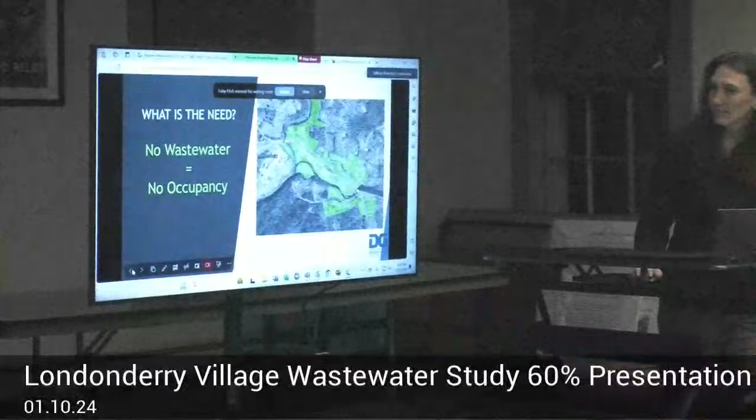So some of the typical needs for wastewater projects. Oh, no. Hope that doesn't keep jumping forward again.

Some of the typical needs for wastewater projects include health and sanitation concerns and aging infrastructure. Properly sized and functioning wastewater systems are critical to public health and environmental protection. The typical lifespan of a private septic system is 15 to 40 years, depending on soils, construction quality, and maintenance.

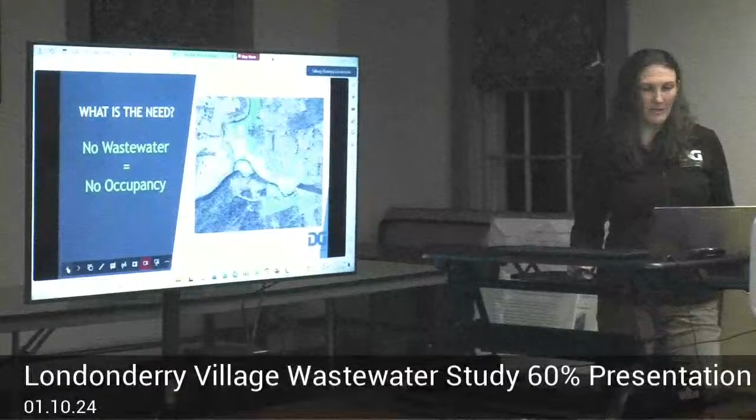Approximately 18% of the septic systems in the North Village and 29% in the South Village are more than 40 years old. Aging infrastructure is typical in Vermont's small villages, as is high-density development or small parcel sizes. It is more challenging to replace a septic system on a small parcel without impacting your neighbor's property, well, septic, etc. Often replacements in high-density villages are a best fit solution that do not fully meet the regulatory requirements.

These are only approved by the state to maintain the existing use of the parcel, as without wastewater capacity, a home would become unlivable and a business or commercial building would become unusable. Between the two villages, there are an estimated 24 septic systems that are within well isolation zones. 2 of these wells are permitted public water supplies. These septic systems tend to be grandfathered systems, and they are not required to improve or be moved unless an increase in use is required or requested.

Another challenge that faces property owners needing to replace a septic system is the existing soils. Soils in Londonderry are generally very challenging for wastewater disposal, and they typically require a mound system or some type of innovative approach, which are costly. Proper wastewater disposal is also critical to environmental protection.

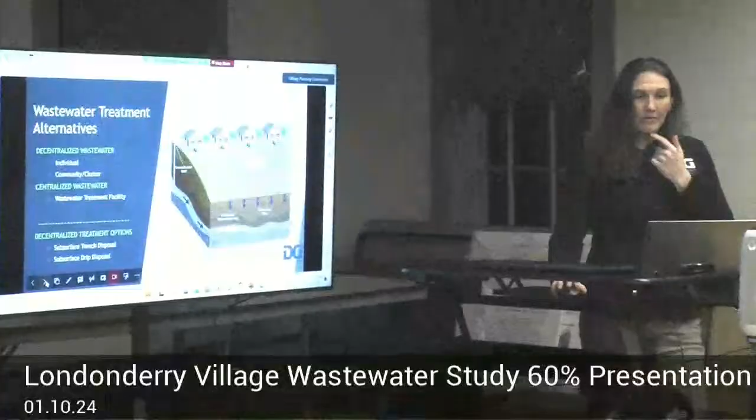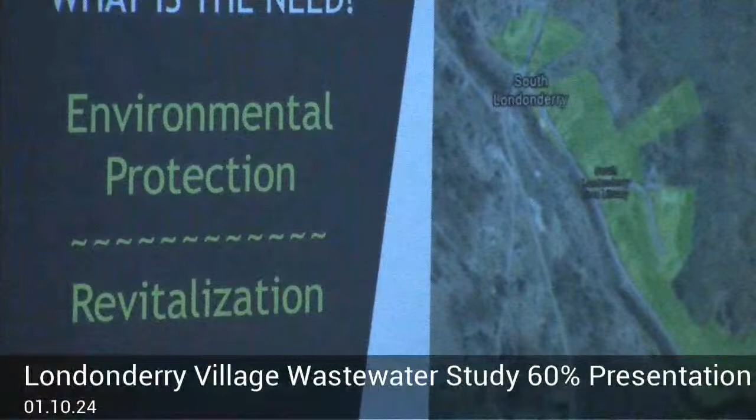Londonderry's 2 villages are located along the West River, with several parcels located within the floodway or floodplain. When flooding occurs, these septic systems are fully submerged in the floodwaters, leaching bacteria, E. coli, and other harmful contaminants into the surface waters. Some of these systems may be washed away, leaving a sewage pipe draining directly to the river. If one of these systems fails, it is possible to replace it within the floodplain, but not within the floodway.

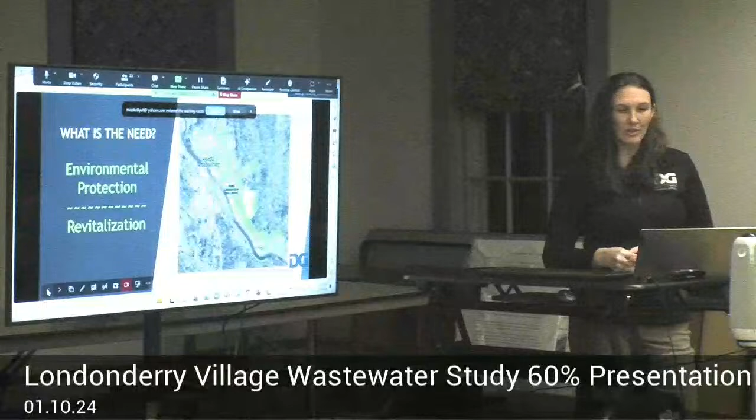The reach of the West River through South Londonderry is considered impaired due to bacteria. The monitoring results that different organizations do throughout the summers show intermittent elevated E. coli levels based on sampling at the Route 100 bridge right here in South Londonderry. The upstream and downstream reaches of the West River are reported to be in excellent condition. So the contamination is likely to be caused by a variety of sources, including septic systems, but we cannot definitively tie it to septic systems. Wastewater capacity also has a significant impact on revitalization.

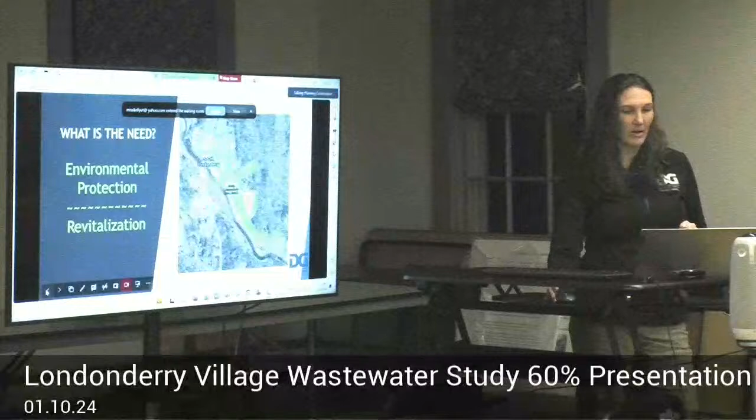Economic and community development, as well as business sustainability, tend to rely in part on available water and wastewater capacities. Due to high density development, water and wastewater capacities and opportunities are limited in the village areas for both existing and new businesses. Businesses tend to get stuck in time where they can't grow any further due to wastewater constraints.

So sufficient water and wastewater capacity would allow buildings to be fully occupied, possibly with mixed-use development consisting of commercial and residential uses. Not only does this allow for revitalization of villages, but also may provide additional housing, which is a critical need in many towns, including Londonderry.

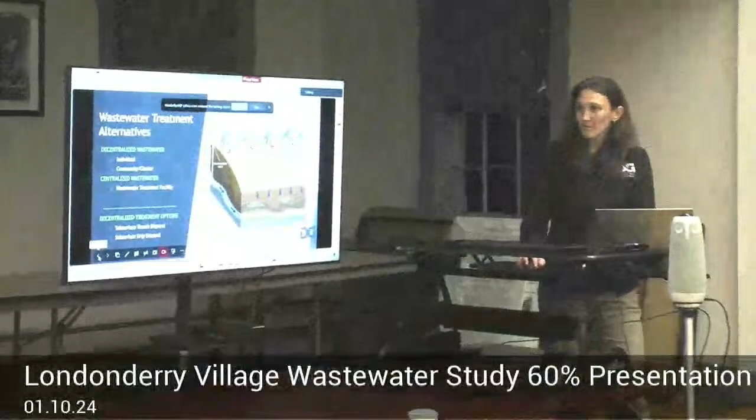Christine, it looks like somebody's trying to possibly get in. I think Heather's taking care of that. It's just a delay.

So we're going to get into the alternatives. Before continuing, I do want to note that we are talking about a 60% report. So the alternatives and costs are still evolving. So if you actually read the 60% report, from front page to back page, and I'm sure you all did,

you may see that some of the alternatives or costs that we're talking about tonight are slightly different from what was in the report. And that's just based on feedback and new information that we've received since the report was submitted in December. And the alternatives and costs are going to continue to evolve as we move into the 90% report and final report and then into final design.

We generally do not expect significant changes to the concepts that are being presented in the 60% and tonight. There are a couple alternatives that are still being evaluated and may have significant positive changes. And I'm going to note those as we go through the presentation. The costs presented in the 60% report and in this presentation, as well as future iterations of the report, are all preliminary and subject to change as the project develops. It's my little disclaimer.

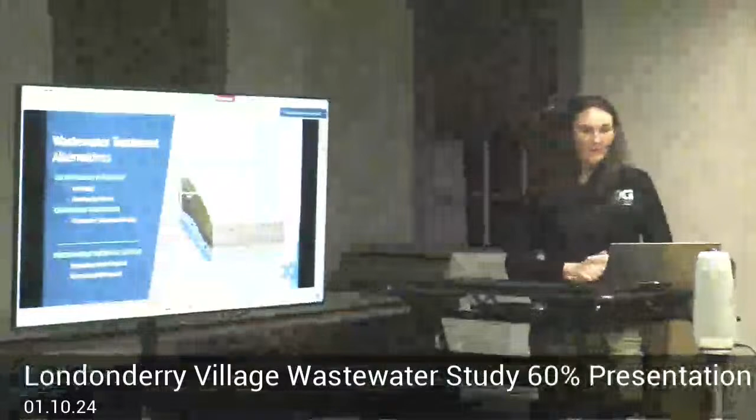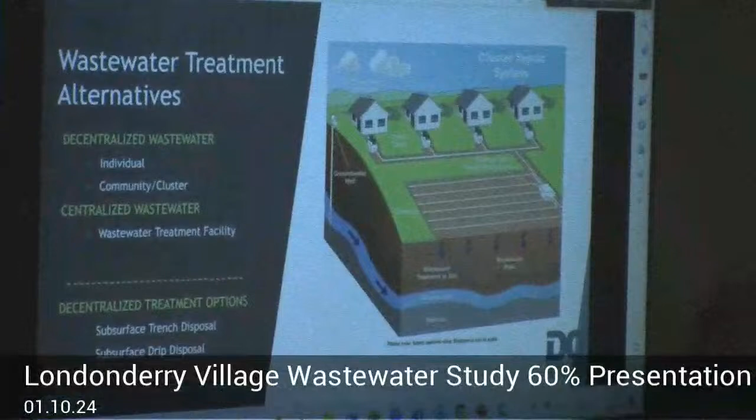So public wastewater systems provide a reliable and low-risk wastewater disposal alternative for properties in villages, and can also greatly reduce the number of potential sources of contamination in and around villages. Options for public wastewater systems include decentralized systems, such as community systems or cluster systems, or centralized systems, such as a wastewater treatment facility.

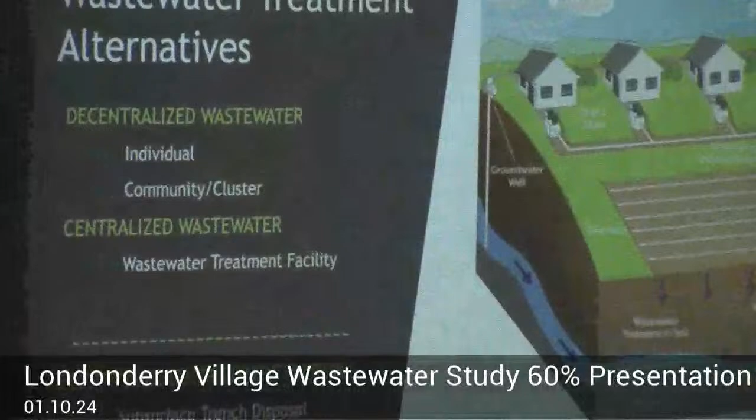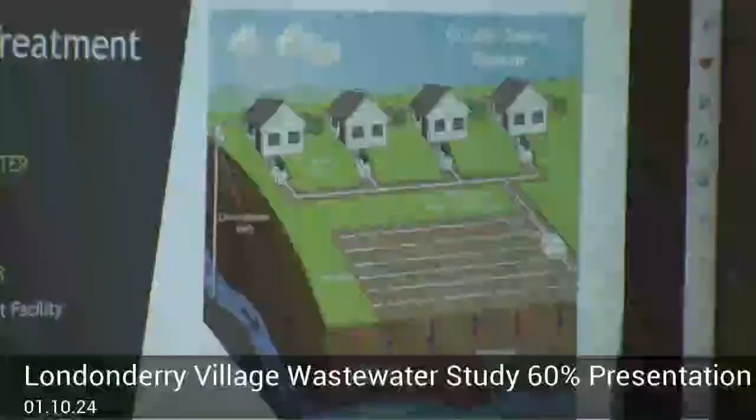When we look at decentralized specifically, those utilize soil-based treatment methods for wastewater disposal. And the two soil-based alternatives that we've considered are subsurface trench disposal and subsurface drip disposal.

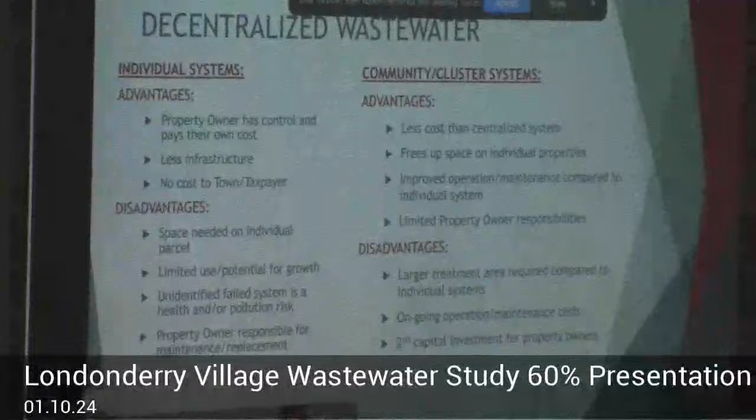So on the smaller end, is this going to jump forward again? On the smaller end of decentralized wastewater is the individual home. So this is what everybody has right now.

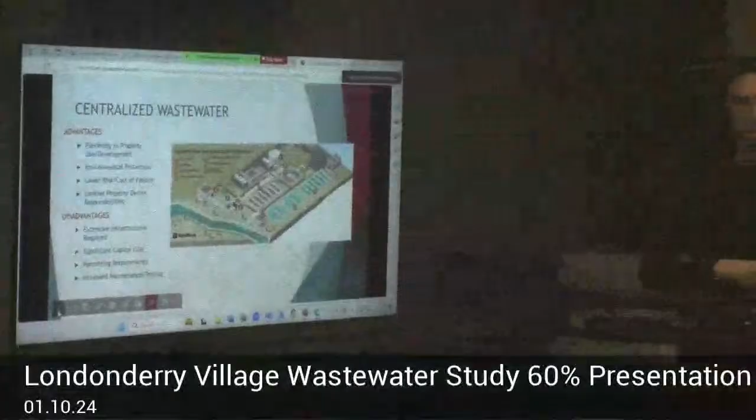Did we jump ahead again? Yeah. Just keep letting me know.

Decentralized wastewater systems can also be utilized to serve a group of homes or buildings and are known as cluster or community systems. Cluster generally refers to a smaller system serving a group of buildings, and a community system refers to a larger system that's serving a group of buildings.

For an individual system, the advantages include the property owner having complete control over the system, less infrastructure compared to any type of community system, and there are no costs that are borne by the town or the taxpayer. All the costs are borne by the property owner.

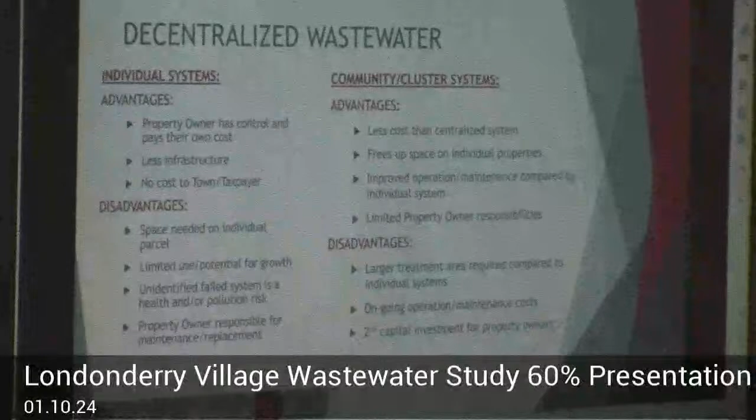Disadvantages are the space required on the parcel for wastewater and how that could impact the use or potential growth of the parcel, health and/or pollution risks associated with unidentified failed systems or systems that are simply not repaired, and the property owner is solely responsible for maintenance or replacement.

For a typical mound system, installation costs can range from $30,000 to $40,000 depending on site requirements. And $40,000 isn't even a cap. Depending on what is necessary, it could even go higher than that.

For a community or cluster system, the advantages include lower capital and operation and maintenance costs when compared to an equivalent centralized treatment system, more space available on individual parcels for wells and buildings, improved operation and maintenance, which protects public health and the environment, and minimal property owner maintenance requirements, which are usually focused on the sewer service itself.

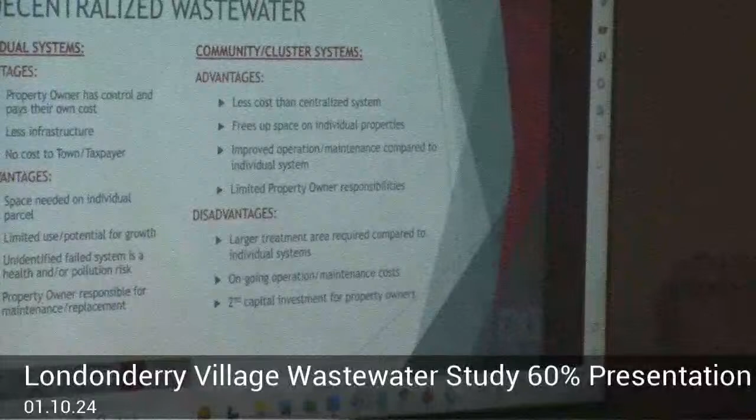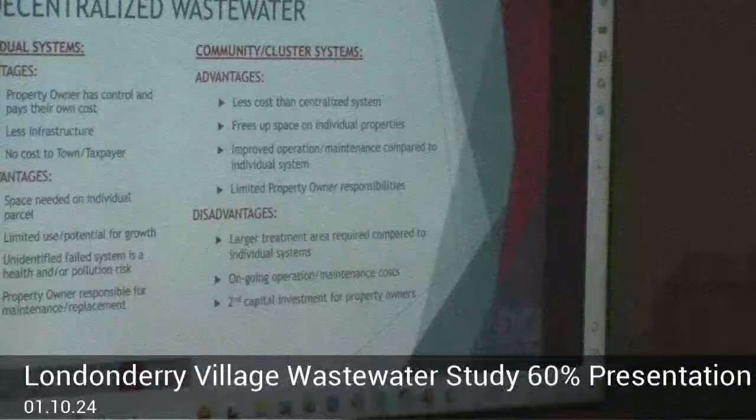Disadvantages are that there is a larger space required for the treatment system as compared to an individual septic system. Ongoing operation and maintenance costs for the users, so there will be annual ongoing costs to operate and maintain the system. And for those property owners who have previously paid for a septic system, that property owner's share of the capital cost of a community system would be a second investment for that property owner. And we're going to discuss cost of the community systems a little bit later.

So centralized wastewater is typically used by larger municipalities and consists of a collection system and a wastewater treatment plant. Centralized treatment plants are typically located some distance from the area that's being served and include treatment methods such as activated sludge, sequencing batch reactors, and rotating biological contactors.

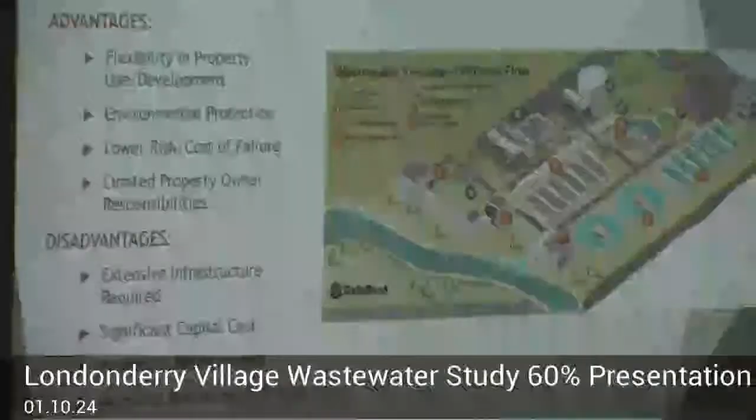The advantages include greater flexibility in property use due to having the space available on individual properties without having a septic system there. And generally, these types of facilities are designed with a decent amount of excess capacity. If you're going to spend the money on constructing one of these, you're going to have some excess capacity for growth, and that allows for a lot of flexibility in terms of various property uses for the properties connected to it.

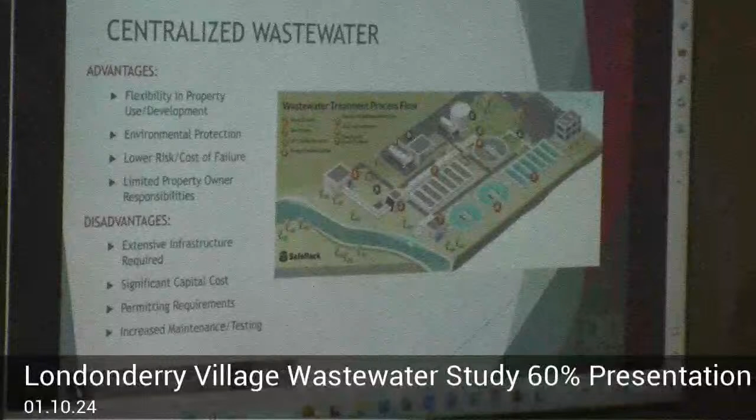Another advantage, greater environmental protection through oversight by a licensed operator and annual inspections of the system. Lower risk and cost of failure per property owner than on an individual system. So if there's a repair or replacement needed on this type of system, you're sharing that cost with everybody on the system compared to paying for it by yourself as an individual. And then again, minimal property owner maintenance requirements, which are generally the sewer service.

Disadvantages are that there is extensive infrastructure required for the treatment plant, significant capital costs for the treatment plant, substantial permitting requirements, and there's regular maintenance and testing requirements, which leads to higher operation and maintenance costs when compared to decentralized alternatives. Due to the variation in type and scale of treatment for a centralized system, the cost can vary greatly, with the cost per connection of smaller systems typically being much greater than those of larger systems.

Based on recent projects, the cost and scale of centralized wastewater is likely greater than what is necessary for Londonderry. And just for example, a wastewater treatment facility serving 1,500 connections has an estimated replacement cost of over $21.5 million, which equates to approximately $14,000 per connection. A smaller facility serving 140 connections with an estimated replacement cost of $12.5 million is averaging nearly $90,000 per connection.

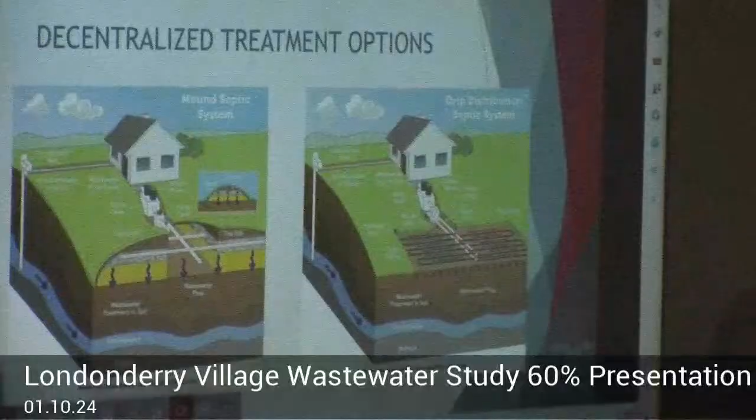So as I noted previously, there are two alternatives for treatment in decentralized systems. Subsurface trench disposal is shown on the left as a mound system, which is the most common type of treatment or disposal system you're going to see here in Londonderry. This is also, in general, subsurface trench disposal is one of the most common methods of subsurface wastewater disposal.

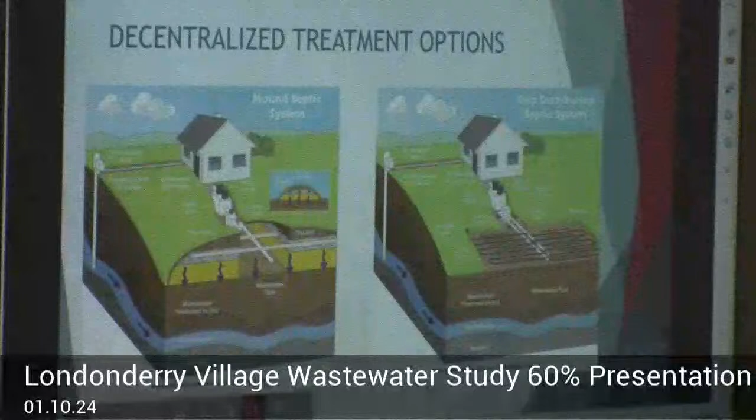If we ignore the house in the background of that schematic there, a community system would look very similar to this diagram. Wastewater effluent is being pumped through pipes laid out in a grid system, 1 to 3 feet under the ground, and exits those pipes through small holes in the pipe called orifices. The wastewater effluent is treated by microbes in the soil as it infiltrates, and due to hydraulics, there's limited flexibility with the shape of these disposal fields.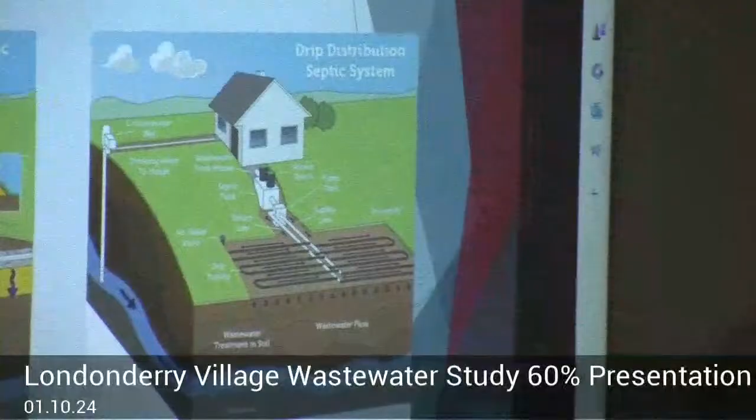Subsurface drip disposal, shown on the right here, can provide more flexibility than trench disposal. Wastewater effluent is dispersed by pumping through small flexible tubing with controlled orifices that are installed 6 to 12 inches below the ground surface. These systems are increasingly popular where disposal fields are placed under recreation fields or large grassed fields, lightly wooded areas, and on sites that have sloping or irregular topography. The layout flexibility allows for installation in a variety of shapes or around fixed objects.

And the subsurface drip systems require pressurized dosing and additional filtration to prevent clogging of orifices. The capital cost of these kind of systems are often comparable to or less expensive than conventional trenches.

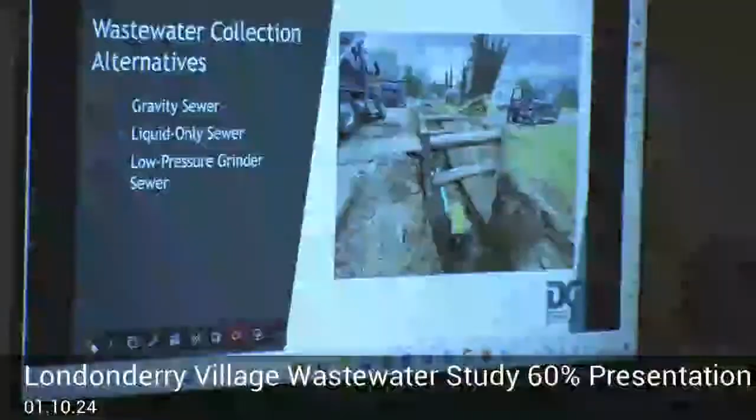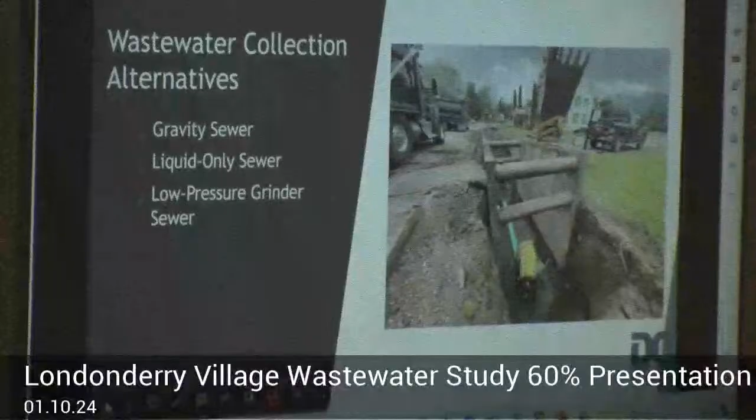So in order to convey wastewater from individual properties to the community treatment system, collection systems need to be installed. Cluster systems, community systems, and centralized systems all require collection. In a cluster system, the collection system is usually fairly small, as the cluster system treatment site is often located close to the properties that it's serving.

In community and centralized systems, the size of the collection system can vary significantly depending on the area being served. Considerations for collection include the type of collection system and the extent of the collection system. We looked at a few different options, including gravity sewer, liquid-only sewer, and low-pressure grinder sewer.

So traditional gravity sewer collection involves a network of pipes and manholes to convey sanitary wastewater flow to lower elevation locations without the use of added mechanical or electrical energy. Modern gravity sewer collection utilizes PVC pipes with gasketed connections and precast concrete manholes at all junctions, changes in slope, or changes in horizontal alignment.

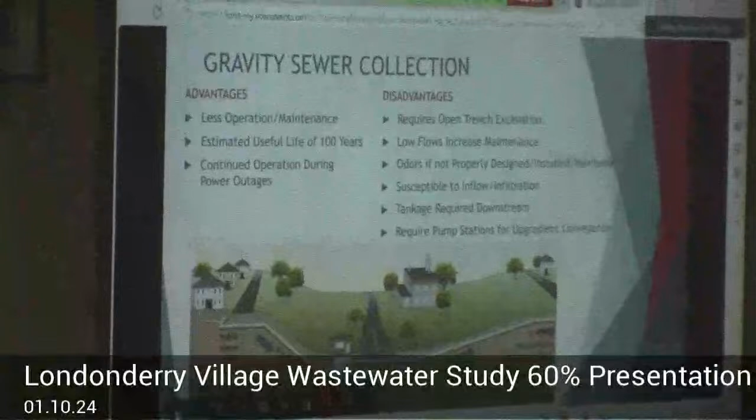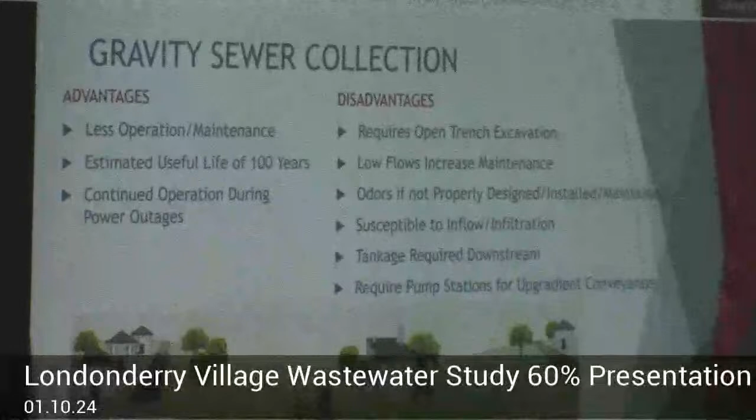Based on the existing topography of the two villages and where the potential disposal field sites might be, it is not possible to convey wastewater from the project areas, the collection areas, to the treatment areas entirely by gravity. The wastewater would need to be lifted using a pump station. This is not uncommon for gravity collection systems, and often they strategically locate centralized pump stations at the topographically low spot to collect and lift wastewater over hills or to higher elevation disposal areas.

Submersible pump stations are contained almost entirely below grade, with only a control panel and alarm light above grade. I will note on this little figure here, it does show a little house, a little building on top of the pump station there. That is not necessary, and many pump stations don't have that.

The advantages of gravity sewer include low operation and maintenance cost when you don't have pump stations, a long lifespan of major system components, and continued operation during power outages, since traditional gravity systems do not require any power input to convey wastewater. When pump stations are required, they, per the regulations, must either have a backup power source, a generator, or emergency storage available.

The disadvantages include significant disturbance during construction due to open trench excavation, which is required since pipes in a gravity system must be laid on straight vertical and horizontal alignments to avoid any issues. Areas of gravity collection system piping that see less than the normal design flow may experience solid settling and deposit buildup in the pipes, which requires cleaning.

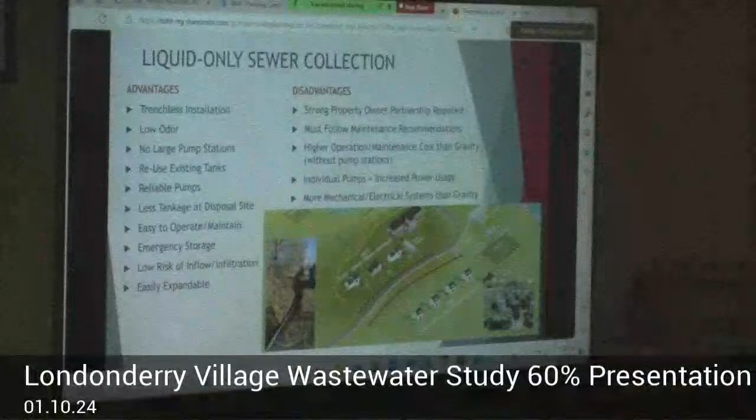Liquid-only sewers are also known as septic tank effluent pumping or STEP systems. They are well suited for areas which would require pumping of wastewater regardless of the collection method. Advantages include minimal construction disturbance, since we don't need to lay the pipes at a specific straight vertical and horizontal alignment. We can use trenchless methods, or, because of the smaller diameter, we can use smaller trench installations.

Septic tank effluent is low odor, and since the system is pressurized, releases of odor to the community are isolated at the intake and discharge locations only, if at all. With the use of individual pumps and pressurized sewers, a larger centralized pump station is typically not required, although it can be if there's a significant elevation increase in the system area.

Most modern septic tanks can be retrofitted with an effluent pump pod to reuse the existing tank. Small pumps are used to pump filtered tank effluent and have a high reliability, low likelihood of clogging. Since the septic tank is provided at the individual property, we don't have to provide one at the treatment site, so there's less tankage there. Septic tank pump pods are operator friendly for inspection and repair.

The emergency wastewater storage is provided by the individual septic tanks, and that provides limited use capacity during power outages or equipment failures. And then portable generators can be used to pump down the tanks into the collection system during any prolonged power outage.

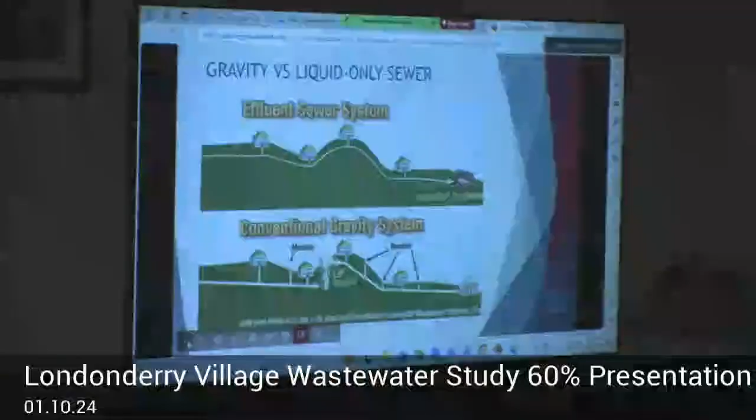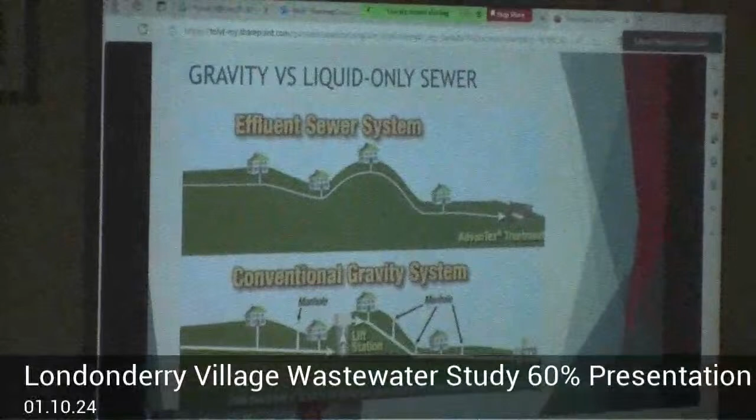So this figure shows a comparison in profile of a liquid-only sewer, called effluent sewer, on the top and conventional gravity. As shown, the conventional gravity requires pipes set at specific slopes, and you can see they're all straight lines, with manholes and a pump station right there in the middle of the profile. The liquid-only or effluent sewer can be set to match the existing grade, and goes up and down with the existing grade. It does not require pump stations.

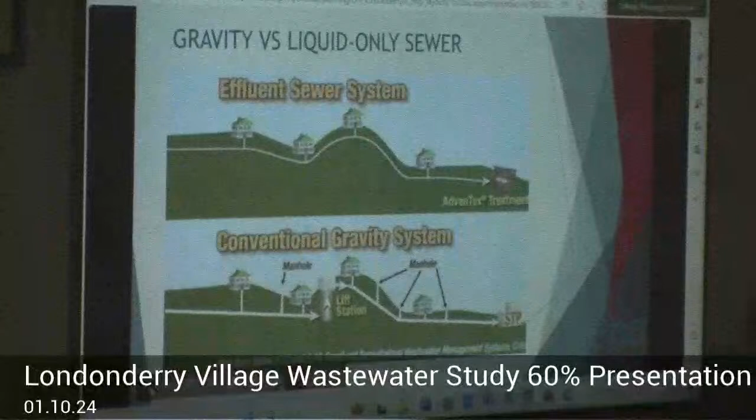The grinder pump grinds the solids into finer particles that are more easily conveyed through smaller diameter pressure sewers. As with liquid-only sewers, these systems are well suited for areas that would require pumping regardless of collection method. Advantages are very similar to that of the liquid-only sewer.

And there's one additional advantage being that the pump chambers are small footprint and easily retrofitted onto small parcels. Disadvantages, again, similar to liquid-only sewer, however, there's a lot more disadvantages here. So in addition to liquid-only sewer disadvantages, with grinder sewers the pumps are larger than the pumps for a liquid-only sewer, and they tend to have shorter lifespans. There is a higher risk for the pipes clogging due to the solids being pumped.

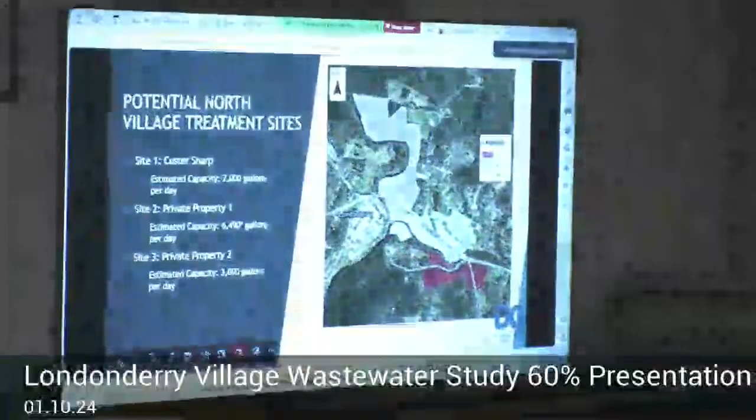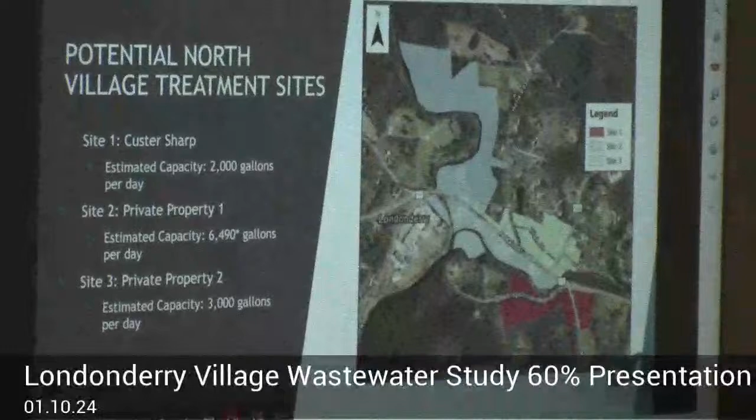So the North Village identified sites include the town-owned property called Custer Sharp, which is on Middletown Road, and 2 privately owned properties. The estimated capacities at each site are shown on the slide, and the potential service area is also shown in the figure here. These potential service areas are not set in stone, and they can be modified as needed depending on what might be constructed and who wants to connect.

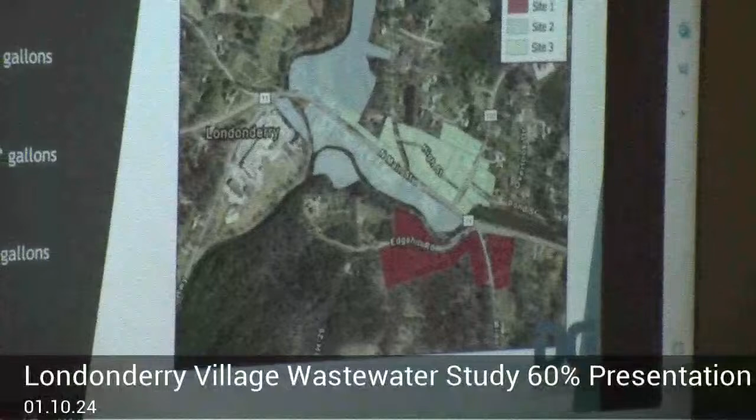It's important to note that all 3 sites combined are undersized to serve this full area here. Because of this, cluster systems should also be considered to close the gap between the available capacity and the projected flows for the North Village. Due to high groundwater, topography and floodplains, the space available for treatment on these 3 parcels is limited. Sites 1 and 3 are very limited in terms of space and capacity, and likely cannot be expanded from what we're showing here, so the 2,000 and the 3,000 gallons. Site 2 actually does have the potential for up to 8,000 gallons per day.

When we consider regulatory requirements for systems over 6,500, there's a permitting cutoff at 6,500 where there's more requirements over that. So when we consider those requirements, we would have to add a second disposal field. And unfortunately, we can't fit the second disposal field on this site without pretreatment. And we are currently waiting on the mounding analysis to be completed for Site 2 to see if we can add pretreatment, to see if the soil on this site can accept more wastewater than what we've already estimated.

So for right now, we're estimating the 6,490 gallons with no pretreatment. We will have the mounding analysis completed for the 90% report, and if pretreatment is possible, we will be evaluating that. If the capacity can be increased to 8,000 gallons, that would allow for additional connections.

So each site was evaluated for the different treatment and collection options. The estimated construction costs are shown for the various alternatives for each site. And as you can see, the liquid-only sewer, the collection is that middle section right there, so the 2 middle columns. The liquid-only sewer is lower cost than gravity sewer for all 3 sites.

On sites 1 and 3, both liquid-only and gravity sewer options must be combined with pump stations due to the hydraulics between the collection area and the treatment area. But being able to use liquid-only sewer in the collection area was less costly than using gravity within the collection area for those 2 sites. Site 2 is anticipated to be solely liquid-only sewer from the collection area to the treatment site with no pump station required.

For treatment options, which is over here on the right, the drip disposal had a higher cost than trench disposal for sites 1 and 3. Drip disposal does tend to be more cost effective as the treatment size increases. So we see that with site 2, we have a larger treatment capacity, and we see that the drip disposal cost has come down below the trench disposal cost.

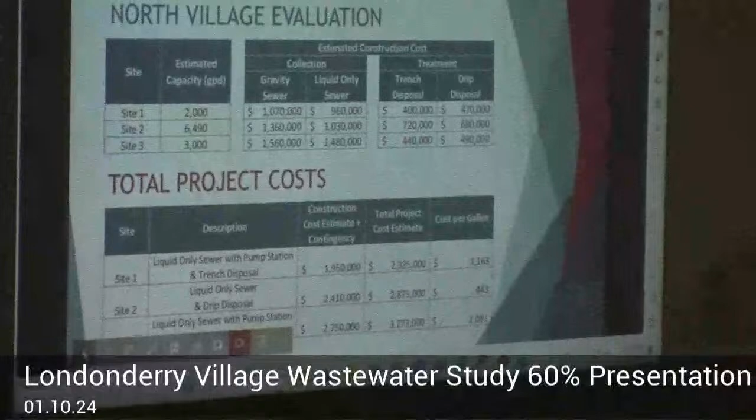For total construction costs, we combine the lowest cost option for each site, the lowest cost of collection and treatment for each site, and we added a 35% contingency and inflation to when construction would occur. And then for the total, that would be this middle column here, the construction cost estimate plus contingency. And then the next column over, total project cost, is the cost of the construction plus contingency plus engineering, project administration, legal costs, and easement acquisition.

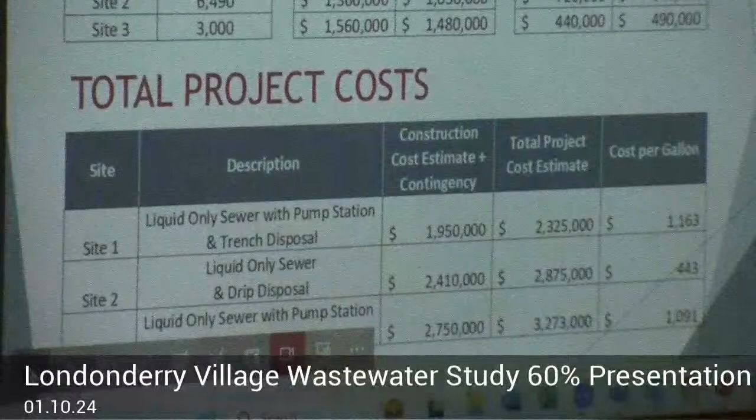And to look at the affordability of each system, we calculated a cost per gallon. And so that's all the way over on the right here. And you can see site 2 is much more cost effective than 1 and 3. You can't actually see the word site 3 down there, but that bottom line is site 3. And again, as I noted before, these are 60% costs and subject to change as we move through the project development.

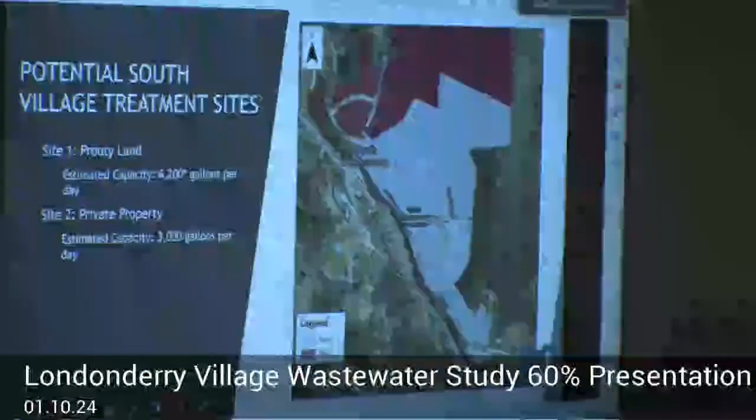So in the South Village, the 2 sites identified are, site 1 is the Prouty land, which is right along Route 100, kind of halfway between the 2 villages, and 1 privately owned property. The estimated capacities at each site are shown on the slide, and potential service area is also shown in the figure. Same as in the North Village, this is not set in stone. We can modify the service area as needed.

And also, same as the North Village, these 2 treatment sites are undersized to serve this full area here, shown in the map. Because of this, cluster systems could also be considered in the South Village to close that gap. And again, same as the North Village, our sites, due to various constraints, are limited in terms of space and capacity. Site 2 is unlikely to be expanded beyond what we're showing here, the 3,000.

Site 1, the Prouty land, does have the potential for up to 12,000 gallons per day. And again, we're waiting on the mounding analysis to come back for that to see if we can actually put that much wastewater into the ground there. It would require pre-treatment, same as the discussion we just had about the one in the North Village.

If we can use pre-treatment to increase this capacity, and here we do have the space to add the second field without reducing the size of the fields, we can add the second field and double this amount. So if we can add pre-treatment to increase the capacity and the soil can actually accept that, we would double the size of that system and allow for several more connections.

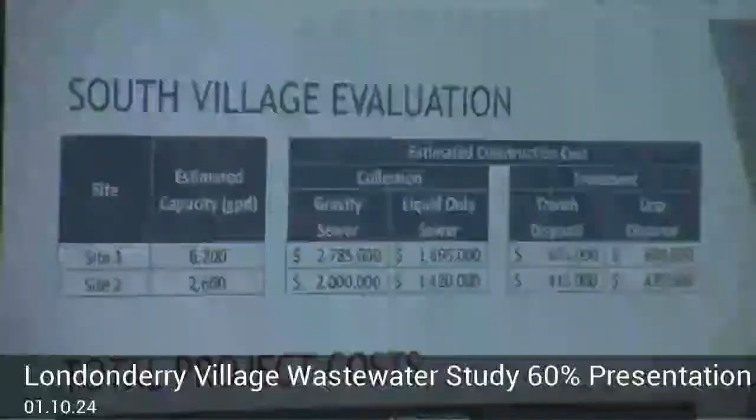So again, we evaluated each site for different treatment and collection alternatives. Estimated construction costs are shown for the various alternatives. And in this case, liquid-only sewer is lower than gravity on both sites, and in both cases anticipated to be solely liquid-only sewer, no pump stations. For treatment options, drip disposal had a higher cost than trench for site 2. Again, that's a smaller capacity site. And on site 1, the drip disposal was the lower cost option.

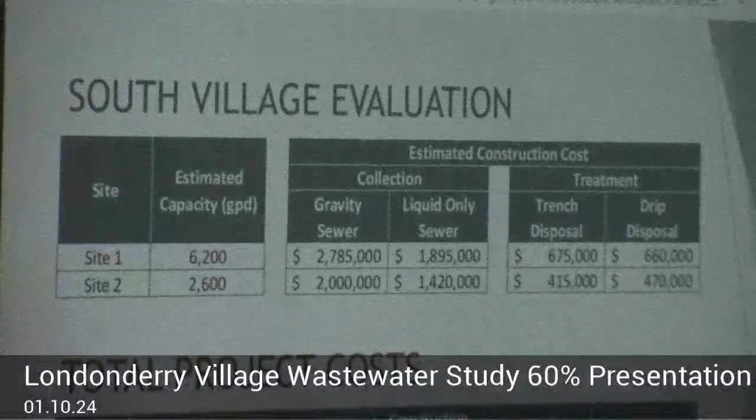Total construction cost was calculated again, the same as the North Village, 35% contingency, inflation to when construction would occur, and total construction cost was calculated that way. Total project cost adds in the engineering, the project administration, legal, and easement acquisition. And again, you can see that the larger site is more cost effective than the smaller capacity site.

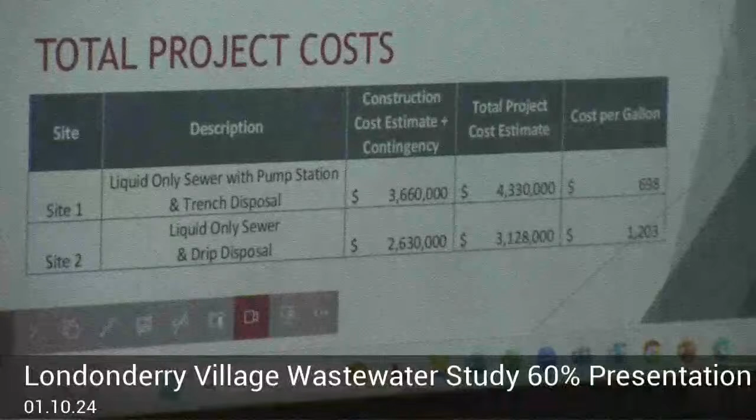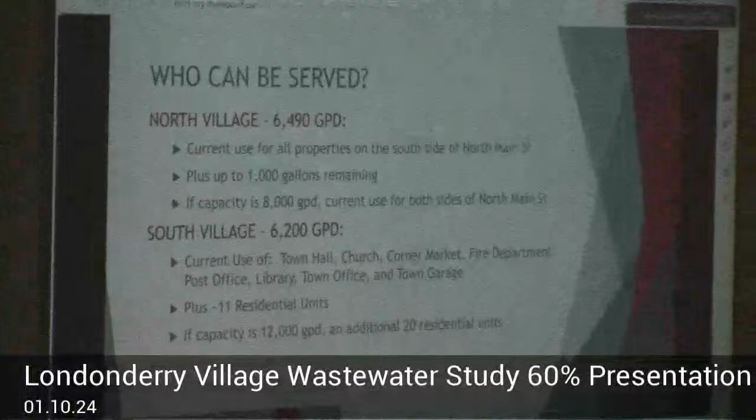So based on these evaluations, we are recommending one site for each village. So this would include site 2 in the North Village, which is the larger private site, and site 1, the Prouty land in the South Village. These were the two options that were identified as being significantly more cost effective. These two sites would not provide capacity for the entire potential service area in either village. However, they would make a positive impact on priority parcels in both villages.

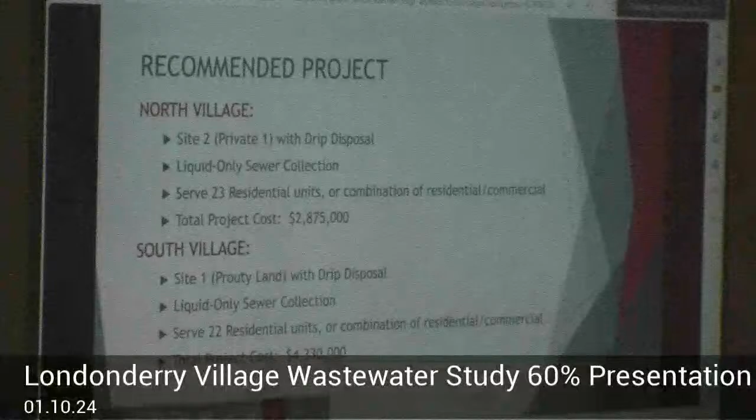In the North Village, most of the parcels are considered priority, but not all would be able to connect if we were at a 6,200 gallon a day, 6,490 gallon a day system. And again, we're recommending the town look at cluster systems to fill the gap there to better serve the North Village.

In the South Village, once the priority parcels are considered, there is additional capacity to potentially serve several homes on top of the priority parcels. And when I say priority parcel, what I mean is that those parcels are in the floodplain, the floodway, they have restrictions for septic replacement, and or they provide critical services to the town. With the limitations, these parcels would be given priority for connection before moving on to other parcels in the area. And as a reminder, both of the recommended sites to move forward with have the potential for higher capacity, and we'll be confirming that prior to the 90% report.

So you'll see here on the North Village, we say that it serves 23 residential units, or a combination of residential and commercial, and the South Village 22. So obviously in both cases, we're not serving solely residential units. A single family home or an apartment on a system like this would have the same design flow regardless of bedrooms. A commercial property can have varying flows depending on what the use of that property is.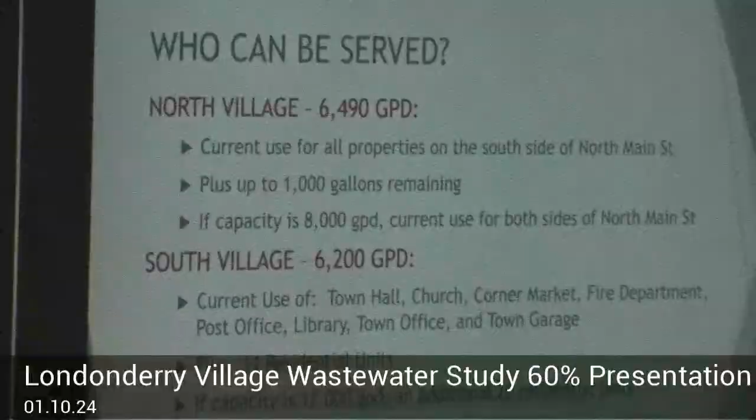If we can increase the capacity there to 8,000 gallons, all of North Main Street, both south side and north side, would be able to connect based on the current uses of each property. So properties that are currently vacant would have 0 gallons per day for connection. But any existing uses would be covered under that 8,000 along North Main Street in that area that we showed.

In the South Village, 6,200 gallons per day can serve the town hall, church, corner market, fire department, post office, library, town office, and town garage, all based on the current uses as of December, plus approximately 11 residential units. If we can double that capacity to 12,000 gallons with the pretreatment, that would allow for potentially another 20 residential units in the South Village.

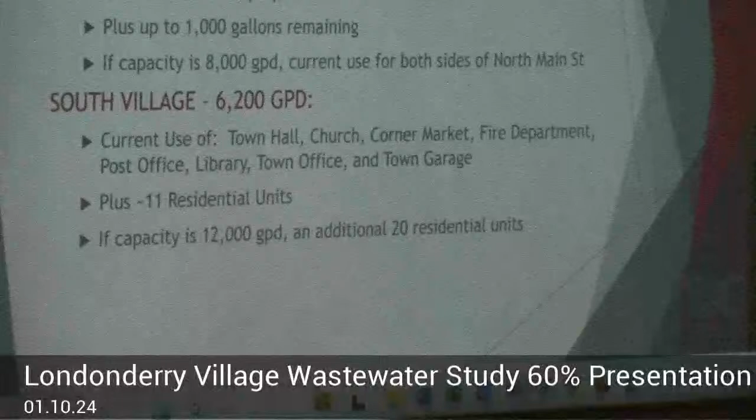So in order to estimate user costs, the annual expenses of the system are calculated. The ARPA grant that the town has received for each village covers 100% of the design, administrative, and easement acquisition costs and 90% of the construction costs. So based on the total project cost estimates, the ARPA grants would cover approximately $2.63 million in the North Village and $3.96 million in the South Village. The remaining local share would be covered by a loan. And in this scenario, we are anticipating a loan from the Clean Water State Revolving Fund at 0% interest for 30 years.

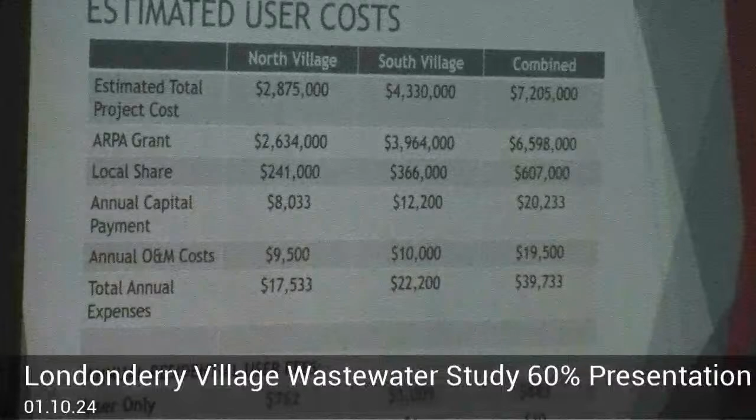In addition to the local share, the annual capital payment, we would have annual operation and maintenance costs. And so combining the annual capital payment and the annual O&M costs, we come up with total annual expenses of $17,500 for the North Village and $22,200 for the South Village. So this is the cost that needs to be paid for each system each year. This can be paid using various fee structures. We are presenting two options here.

The first option is that the users for the system pay for the entire system cost. So if you're connected to the system, you pay for it. If you're not connected to the system, you don't pay for it. For a residential unit, so the single family home or apartment, the estimated annual user fee under this scenario would be approximately $760 if only the North Village was constructed, or $1,010 if only the South Village was constructed.

So the North Village column and the South Village column are based on only one system being constructed. If both systems were constructed, they would be operated under a single wastewater utility, and all of those costs would become combined. And so the annual residential user fee would be estimated at $880.

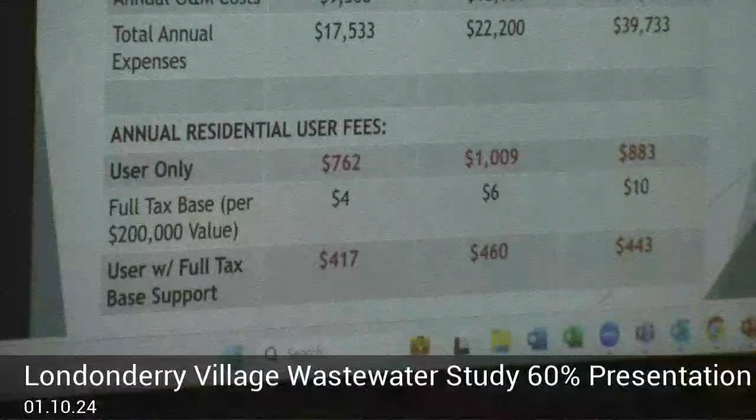So the second fee structure that we evaluated includes spreading the one-time capital cost of the system, so that local share cost, or the annual capital payment, which is just the local share divided by 30 years, spreading that cost over the entire grand list of the town. So the users would still be solely responsible for operation and maintenance of the system.

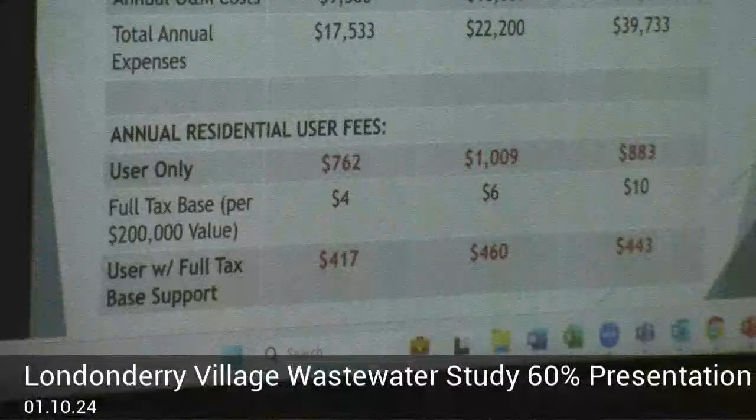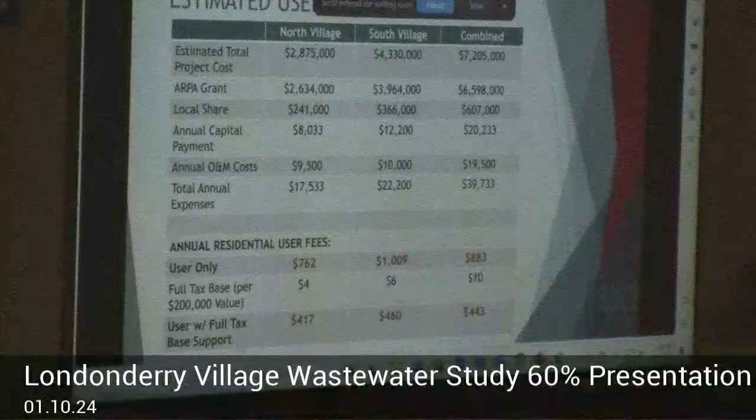And the annual, so that one-time capital cost spread over 30 years. Using the town's current grand list value, a property valued at $200,000 would pay approximately $4 per year for 30 years for the North system, and $6 per year for 30 years for the South system. The users of the system would pay those same amounts, those $4 and $6, plus the annual operation and maintenance

costs. And so the bottom row of the table here shows the impact to the user rate if that one-time capital cost is spread across the grand list. The North Village residential user fee drops to approximately $420, and the South Village to $460. And again, those are only if one system is constructed. So if both systems are constructed, that $200,000 valued property would be $10 a year across the grand list, across everybody in town, and the users would be paying approximately $445 a year.

Let's see here. And again, I've said it a lot of times, these are preliminary costs and subject to change. The select board will ultimately make the decision on how user fees are structured, and this will depend on what ends up being constructed and what the final costs end up being. The local share will need to be covered by other grant funding or a bond vote. And at this point, the town is planning on a bond vote, which could then be reduced in the future by any other grant funding that becomes available. And the voters of the town will vote on the bond.

The final report must be submitted along with our environmental review by April 15th, 2024. Final design, all permitting, and all easement acquisition must be completed by September 30th of 2024. And construction closeout must be completed by August 31st of 2026. Failure of any ARPA grant recipient to meet any of these deadlines will result in a loss of funding.

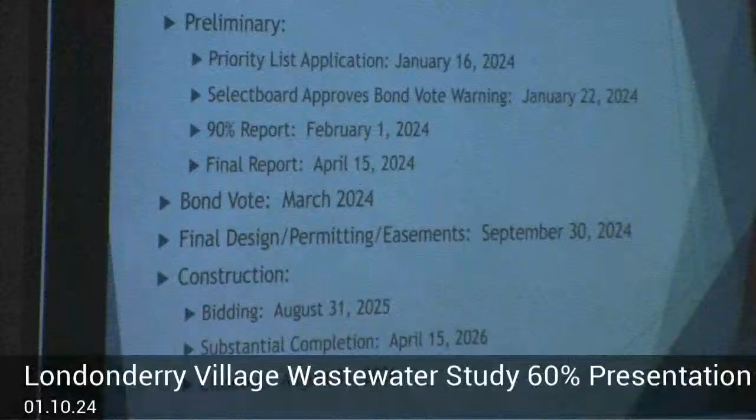So before we move to questions and comments, of course it lost that. I'll just do this.

Please note, if your property was not included in any of these figures on here in the shaded areas, that does not necessarily mean you can't connect. If you are interested in connecting and you're in close proximity to the potential service areas, please contact the committee so we can provide you with a preliminary determination on potential connection.

Gary noted the email address to begin with, but it's up here also, and I think it's probably on that paper as well. So, londonderryvwc@gmail.com. Please send an email if you're interested in connecting or if you have any comments or questions about the 60% report or the project in general. We are happy to answer those and we'll be responding to any emails that come in. And that's all I have, so thank you.

Questions? Do you want to go back? Yeah. Move it out here, you mean? Yeah.

Go for it. You've mentioned pre-treatment, and so is that something that needs more infrastructure too, or what is that? That's a good question. So pre-treatment would be located at the disposal site. And what it would be is some underground tanks, so one of the options we're looking at, they're all proprietary types of things. They are basically like filters, so they're underground tanks, and the wastewater can filter through them, and it cleans the

wastewater more before it gets to the disposal site to the actual soil treatment, so the hope is that we can put more of that into the soil at one time. So we're pre-cleaning it basically, but it's all underground at the site. The only thing that might be above ground at the site is a control panel for it. Chrissy, is that like a filtration system to take out more particulate in order to make sure that mostly only water goes to the disposal field?

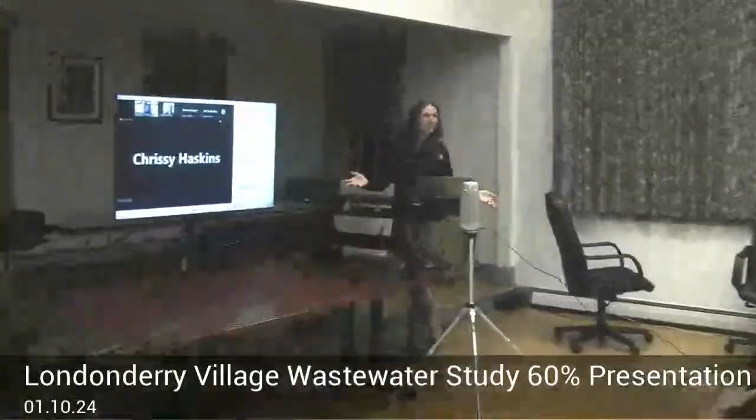Sure. So the town, if a wastewater system is constructed, the town will need to create a sewer ordinance. And that ordinance will have restrictions on what you can put down the drain. So you can't put hazardous materials down the drain. You shouldn't be putting a lot of fats, oils, and greases down the drain.

Nothing with high, I'm going to get into technical terms here, high BOD. So if you're brewing beer, don't dump that down the drain. Don't empty your entire wine rack down the drain all at one time. Things like that. High sediment loads, unusual pHs, anything like that could not go down the drain.

Chemicals, including chemicals like cleaning products? It depends. It depends on what the product is and what the volume is. We're looking at unusual things. Normal cleaners that you're using in your house are not typically an issue.

There would also be, generally we don't want garbage disposals. We don't want you connecting your sump pump in your basement to your sewer line. We don't want you connecting a roof drain to your sewer line. Things like that. So there would be an ordinance that spells out things that are prohibited to be sent down the sewer, and rules about the use of the sewer.

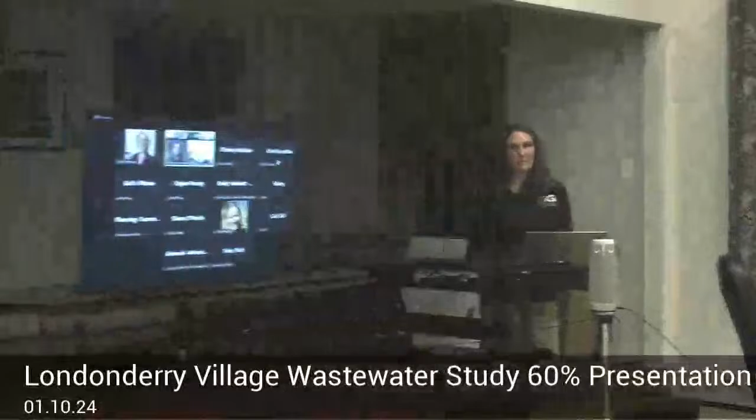Seeing a lot more faces on the screen now. Oh, I changed it, I'm just looking. Yeah. Some of those people. So any other questions?

I don't have a question, I have a recommendation: based on this meeting, if people in the audience or people in the Zoom meeting have interest in this project, see themselves wanting to be a participant or a connector, that they please advise the committee and let us know that we're going in the right direction, and that this is something that's got some momentum, at least for the critical areas.

So it sounds like even if you don't have a question about the project or interest in connecting, maybe even reach out with an email to the committee to show support. Sure. It's sort of one of those things, you might not need it now, but sometime you will. And you'll be glad you did.